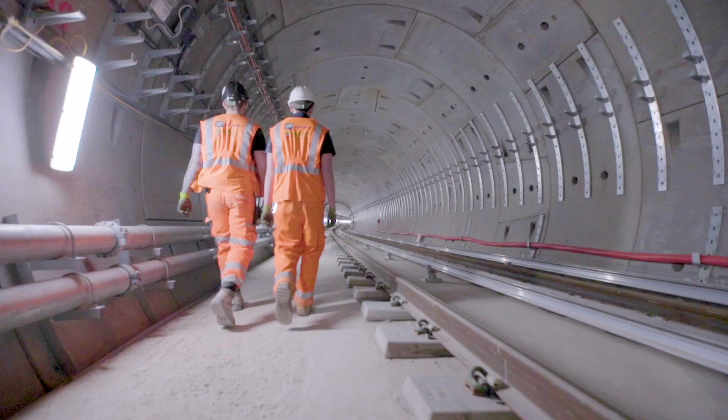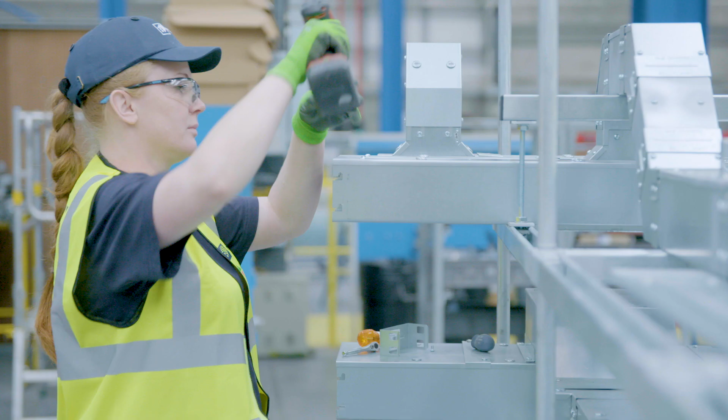NG Bailey, the UK's largest independent engineering and services business, is proud to have provided its expertise to support the national effort to combat the COVID-19 pandemic. Utilising our pioneering offsite manufacturing facility in Bradford, our dedicated team designed, manufactured and installed equipment to fit out essential NHS Nightingale hospitals across the country in record-breaking time.

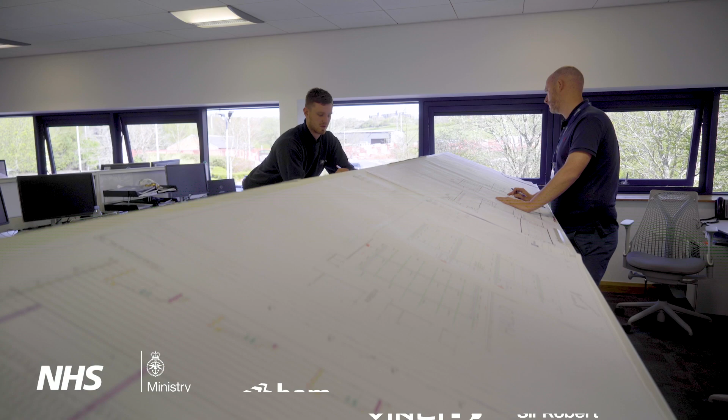Working in collaboration with our valued partners, we designed a range of bespoke solutions, with the first of these manufactured and delivered to site within 24 hours, helping to transform existing premises from a standing start into fully fitted and functional specialist care facilities within days.

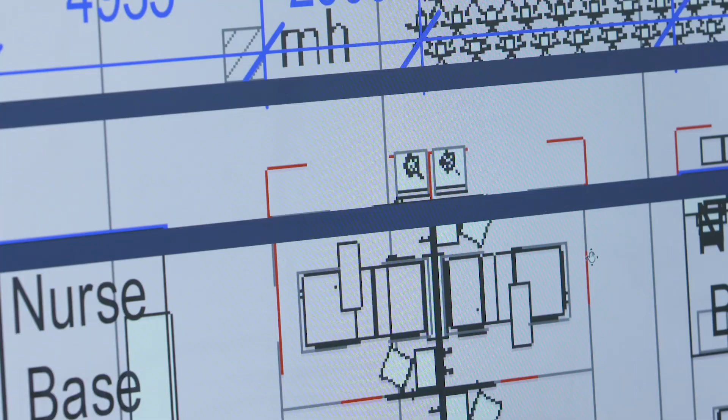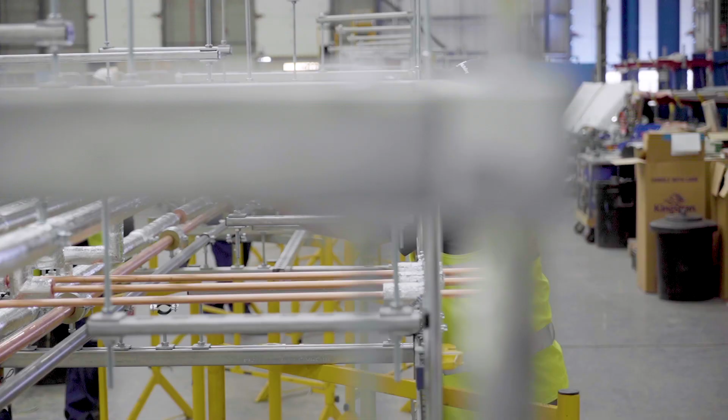Seamless project logistics saw us rapidly design a range of essential equipment, quickly create prototypes, and manufacture high-quality critical components for these life-saving field hospitals. Our off-site manufacturing capabilities were fundamental to the successful rollout, enabling rapid production whilst maintaining safe social distancing measures.

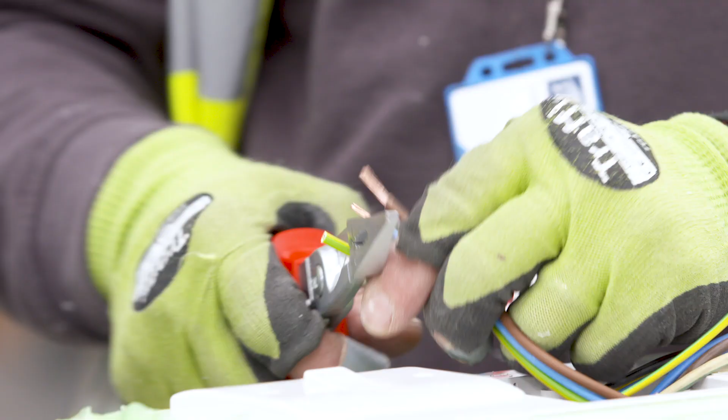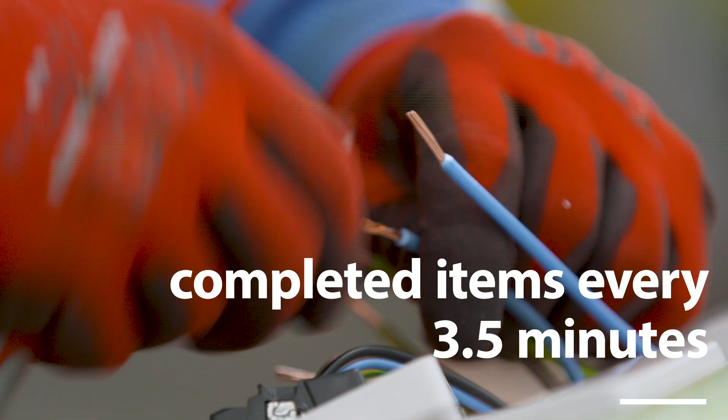The speed of operations meant that our bespoke solutions were manufactured, transported to site, and installed often on the same day. At the height of production, completed items were coming off the production line every 3.5 minutes. The off-site approach also enabled us to remove 12,000 working hours from site.

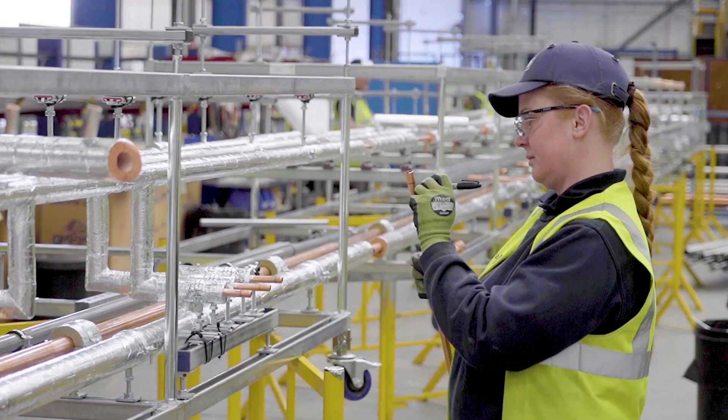Simultaneously, our on-site multidisciplined engineers were busy fitting other vital services, bringing everything together with a reliable end-to-end solution. As a family business, we were honoured to have the people, skills and capacity required to help the NHS save lives by providing care and support to families across local and regional communities.